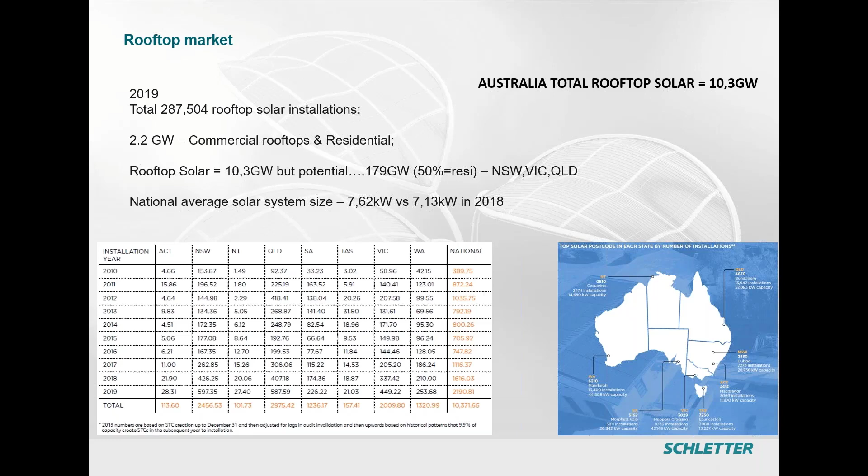A little bit about the company. Schletter is a global provider of solar mounting structures. We've been in the business since 1968 and in Australia since 2011. Cumulatively, we installed around 35 gigawatts of mounting structures. In Australia, that figure is around 600 megawatts.

It's a significant business because we're an international company. We have the ability to scale. Headquarters are based in Germany. We have production sites in Germany, USA, and China, and branch offices in all the major countries. So it truly is a global business.

We don't offer simply rooftop solar. We also look at fixed tilt structures, which is a very big part of our portfolio. We've just launched a single axis tracking solution, which has already started to roll out in New South Wales. And then, of course, we do carport systems, and various different rooftop systems. So we cover the whole gamut of solar mounting structures.

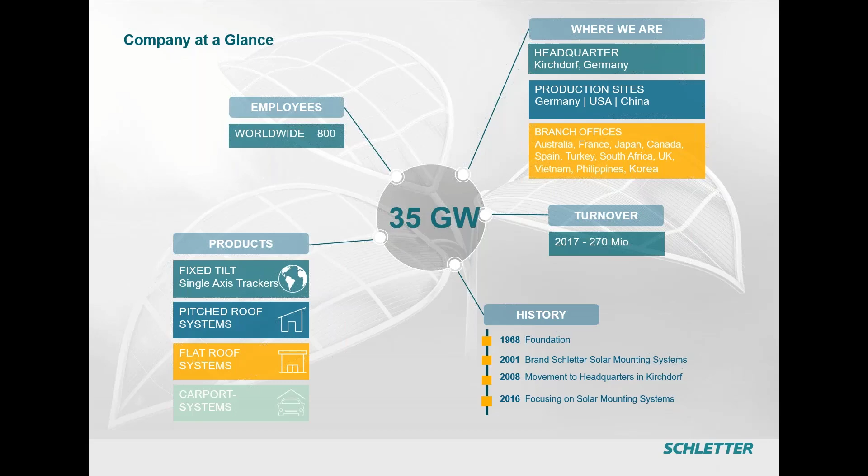As I said before, ground mounted systems, flat roof, we cater for pitched roof as well, facade, carport structures. We've partnered there with a company called Solar Carport Solutions. Together with them, we will continue the rollout of our solar carports, and then more recently, the single axis tracking solution.

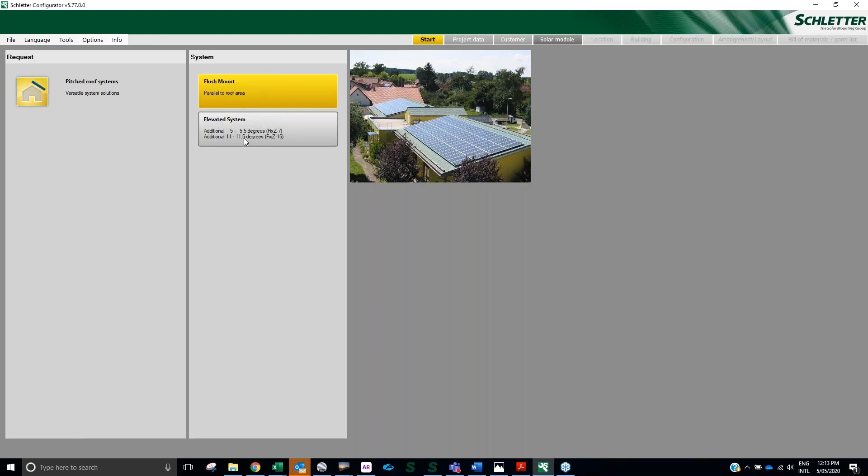And you might find later on that you will see some German words still in the tool, and little by little we'll be translating those for you. So as an assumption for this discussion, let's use, for pitch roof, just a flush mount, because the elevating system might take a bit longer. And it's just an introduction.

So we use flush mount, and then you go to project data. So don't worry first about the order number, we're still talking on how to serialize this one. And then for the project name, you can go for ABC if you want.

And then the company name, and then who is using the tool, and then all of this data.

Now, for solar modules, I'd like to emphasize, I know there was a commitment of under 20 minutes, and this is really going to happen after a certain number of times that you use the tool. Things you have to prepare before using the tool, this will even be lower than 15 minutes if you have the following prepared.

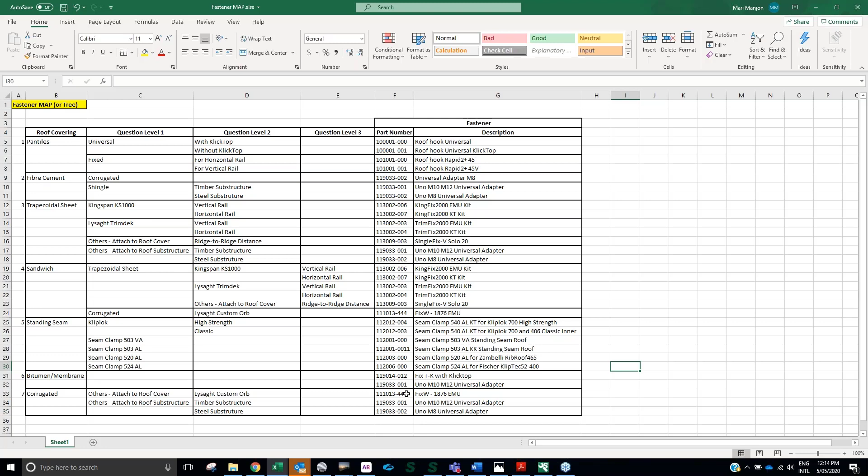So if you know the roof type, there are several roof types. Just to give you some examples, roof types could be tiled, fiber cement, trapezoidal roof, sandwich, standing seams, bitumen or membrane, and corrugated. Under each of those, you still have several types, and then under, let's say, a Lysaght Trimdek, you have a vertical rail. So these are things you have to be prepared for prior to the start.

And then, of course, you have to know and identify the area where to mount with dimensions, and then an intended layout, what system you intend to use, and the module data.

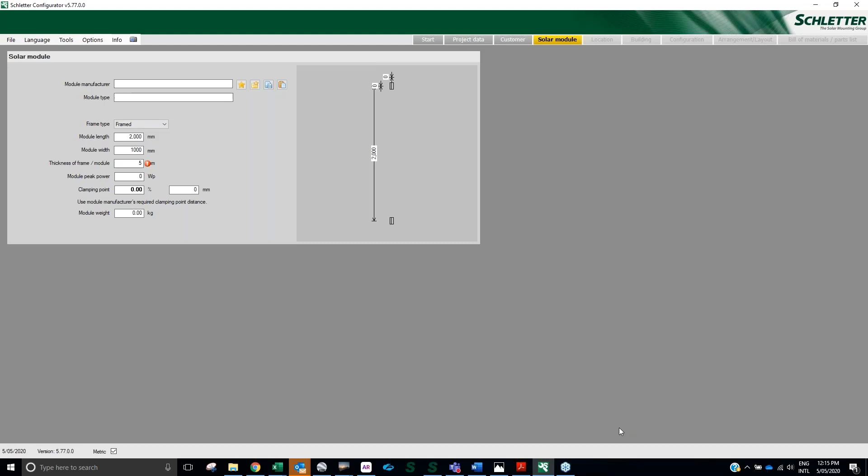For the module data, what we need is really the length, the width, the thickness or height, and then the power. Let's use examples here: let's say it's 2 meters long, 1,000 wide, 40 mil thick, and we have 400 wattage per panel.

And then clamping point - it is always best for you to have the manufacturer's data on the module, because there you will find the clamping points, and normally it's 25% from the edge.

And then you'll also get the module weight. So if, let's say, this is 20 and you are not sure if it's 20 or 22, always take the lighter weight that you are thinking of. It will always be safer, more conservative. But of course, if you have the manufacturer's product sheet in front of you, you don't have to guess the module weight nor the clamping point and all of this.

So once you have filled this up, you'll be allowed to move. You have a graphical representation here, and then you'll be allowed to open the location tab.

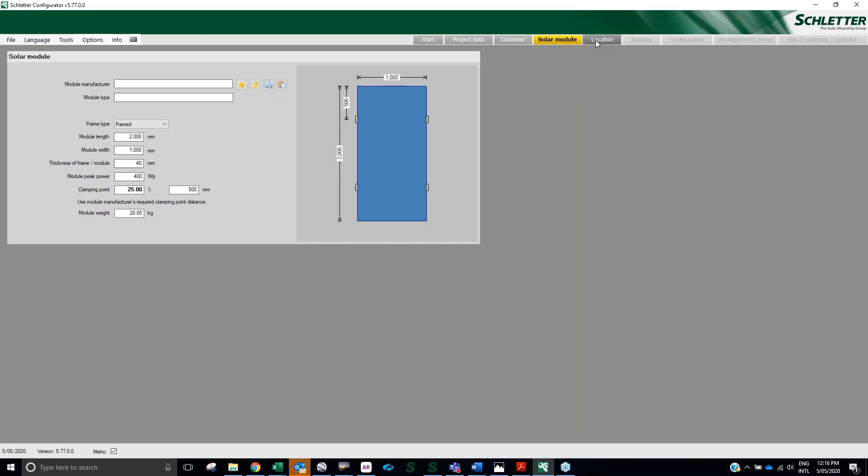Location tab, of course, like I said, you have to prepare the info on the location. So let's say it's Sydney, just an example, and let's say you have those points. Here you have to input the exact street, although that will not impact any part of this calculation.

But this height above sea level, you have to know, right? So if you're asking, how will I know the height above sea level, and how will I know the terrain category, I suggest that you go and use Google Earth, something like this.

Let's say the project was in Derby. So just type Derby and then go close. And let's say it's this house that you're doing a design on. So you try to measure that house from the sea - you see there, it's only 161.

And then you have to know the level of salinity. If you don't know, but you're facing already the ocean, you can be assured it's high in salinity. So if it's less than, let's say, 400 meters, the aluminum components will have to be anodized.

But the thing you have to know in terms of filling up the spreadsheet will be the height above sea level. So if we're doing a project on this roof, the height above sea level you will find here - this one, the height. If it's this one, you see it's almost 66. If you move around it, it's still 66.

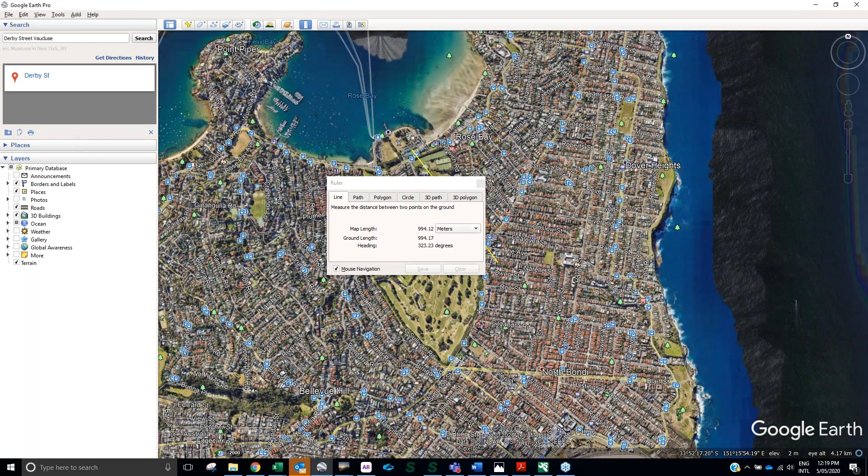So if it's here, and then you try to measure that place, it's almost 1 kilometer from there, then that will really change this one. It's no longer terrain 1, most likely it's terrain 2. Okay, so terrain 2 area with low vegetation, etc.

So you'll have to acquaint yourself. In the first run, try to read all the definitions so you'll be on the same page.

And then if it's a house, 1, 2 stories, up to 15 stories, not many people will be in there, you can consider that as an importance level of 2, and then go for 200 years. But if you go for higher buildings or emergency facilities like airports, hospitals, etc., they are high importance level, so you have to choose 500 years.

Now for the corrosivity, if you don't know, try to check and imagine the distance from it using, again, Google Earth. So if you're very near, this cannot be moderate, maybe it's already severe, almost equivalent of having swimming pools or chemical plants around it.

Okay, so after you're finished with the location tab, you go to the building tab. Building tab, like I said, you have to prepare the dimensions of the area that you plan to install.

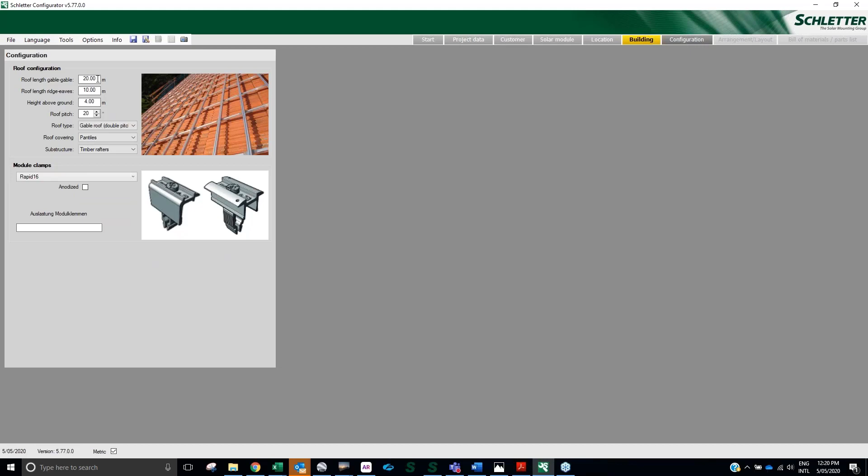So you have the gable to gable. Just to be sure, the definition of gable to gable is that length. Ridge to eave is this. And then the height above ground, which we saw was 6 meters based on the Google Earth.

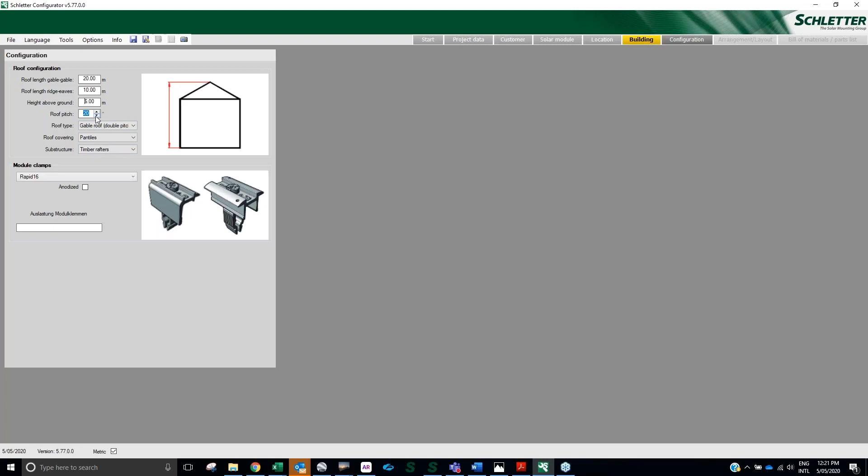And then roof pitch is, let's say, 20, or you can go 19 or 18, etc. And then the common one, it's trapezoidal roof. And let's say you have timber purlins, right? So those types.

And then now Rapid 16, it's the type of module clamp. So this is how it looks. If you want them anodized, because that area most likely will need to be anodized, so this is how it looks.

And then here, don't mind this initially because we have not loaded the data that's intended for this configuration. But this one will tell you that these ones are going to be within the tolerance.

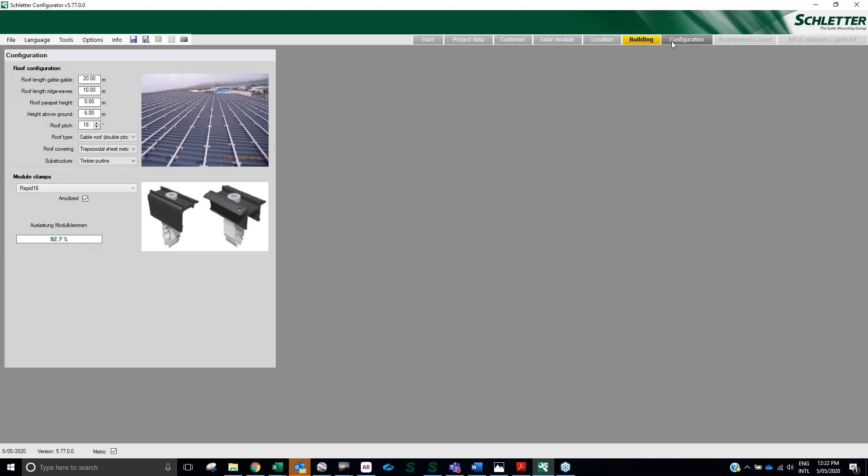Okay, then we go to configuration. So it was pre-filled already in previous page for the 20 and 10.

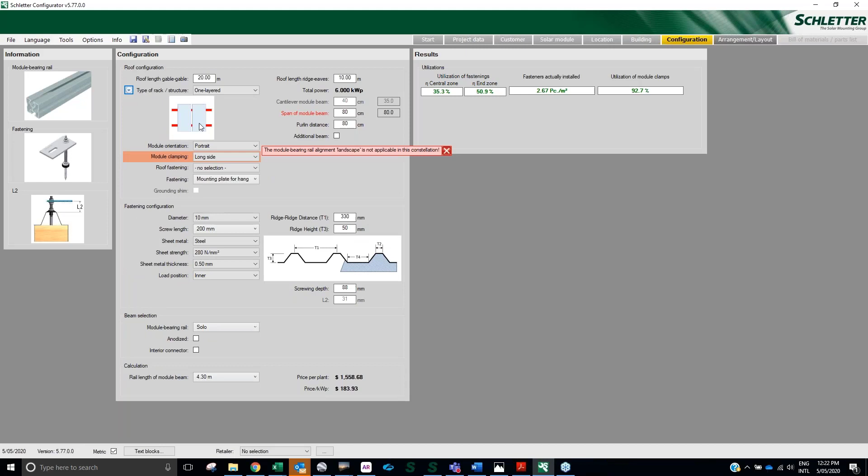One layer or double system. If you're not sure how it looks, you can press this down arrow, and then this is how it looks. If you chose the double layer, that's how it would look.

No? Hold on, I have to go back to building afterwards.

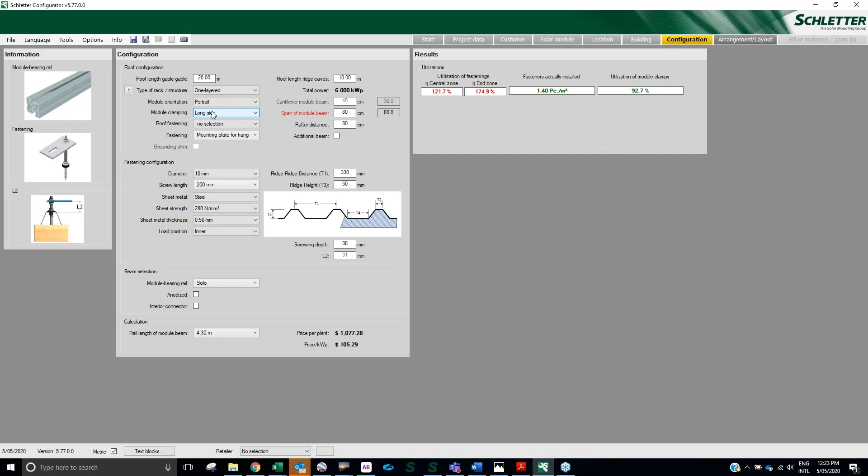So now we do not need, let's say, to go cross-layer, we only need one layer. So we want to clamp on the long side, which is the usual clamping point specified by most module manufacturers.

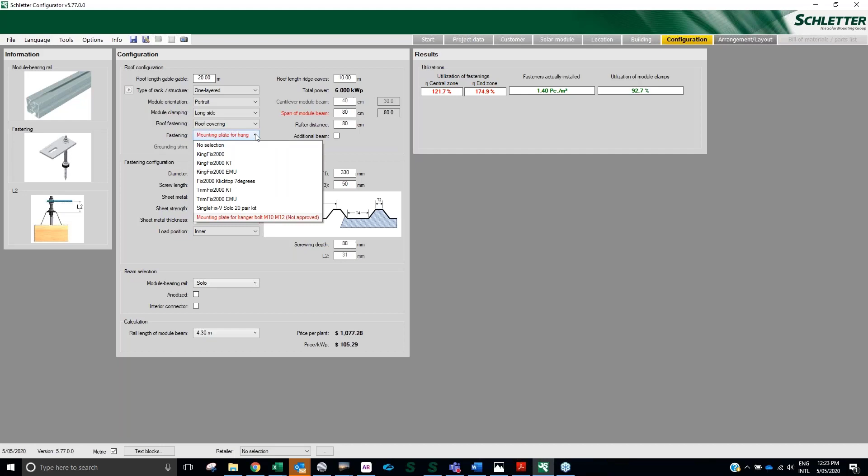So the mounting fastener that we plan to use is kingspan special design, which is KingFix2000 KT, which means a Klicktop. So we have that, and then we know the thickness of the roof.

And then when it's kingspan, the ridge to ridge distance of kingspan is 333, and the ridge top width for kingspan is 30, and then the ridge height for kingspan KS 1000 is 35, and then the valley of kingspan roof is 270.

So you'll see what these T1, T2, T3 are. You'll see it from this. And based on the roof manufacturer's data sheet, you'll be able to get all of this info.

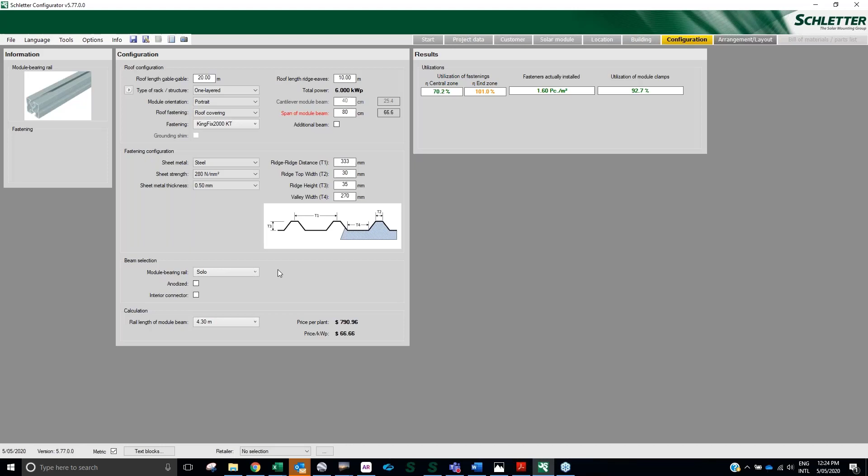And then now you will see that you have to decide now on the use of the rail. So the rail, you will see, let's say Eco, that's the cheaper one. Solo will be the usual, Solo Plus will be the stronger one, as evidenced by the amount of utilization that you'll see here.

So this area here shows you the utilization rate. If it's in the center zone, it's 78.2. Now if you're in the end zone, it's 0. It's above 100, which is 101%, but it's in orange, no?

So you see this one, the ridge to ridge distance of the Kingspan roof is 333. So this is 66.6. So you have to match it to 66.6 if you want to go 2 ridges.

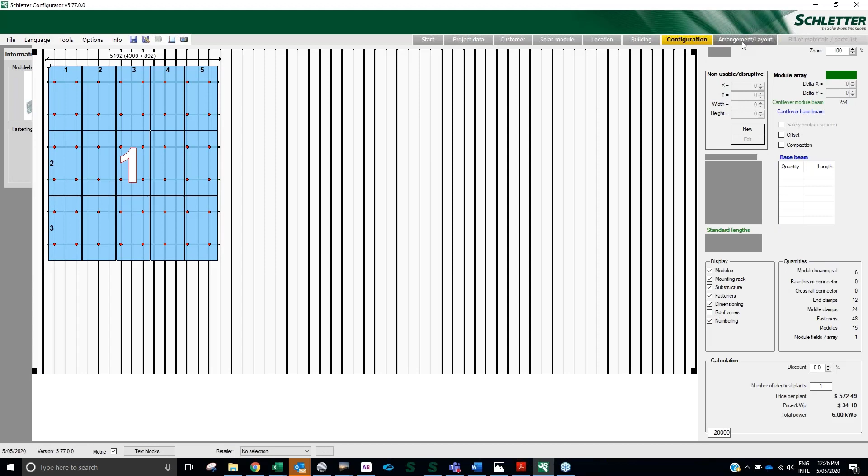Okay, and then now we go for the layout. Layout, let's say the customer wanted to do 2 rows of 10. So you can edit that one to 10 per row and then 2 rows like that.

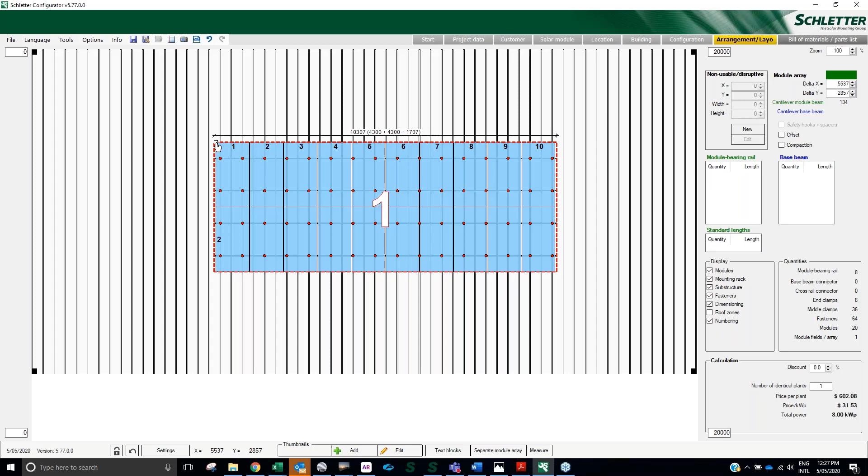So these lines here represent the range of the roof. So if you want to put it in the middle of the structure of the roof area, that's it. You're done.

So you want to see the bill of materials, it's there. So you need 10 rails of the 4.3. You need 8 pieces of the connector, and then this is the fixed KingFix 2000.

We still have to improve, like I said, it's a work in progress. And then it is 64 pieces of that.

And then we have to add some self-tapping screws for this, which is 4 times 64. We have to manually enter that here.

And then it tells you already the mounting clamp that you need, and then the ends, the mids, and then the grounding. Grounding, we normally allow 1 grounding clamp per row only.

Okay, so these ones at the start, I will have to get what we call, let's say this one will be saved in an XML file that we call.

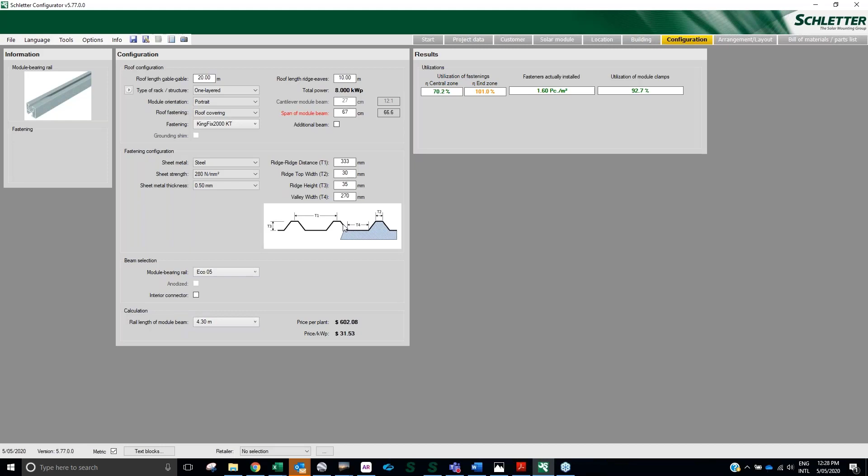And then I have to check it because there are still things here that have to be added. Because you see the configuration here, Eco, you have to pick the anodized one, which are still not being done. So I have to check it because the location is high in corrosivity, and we have to change everything to anodized. There are some limitations at the moment for this.

We have another version in our office that I can use just to correct it. But at least you will have an idea of the expense. Don't mind these unit rates here, they are not true, they're just dummy figures. And you can immediately have an idea of the BOM.

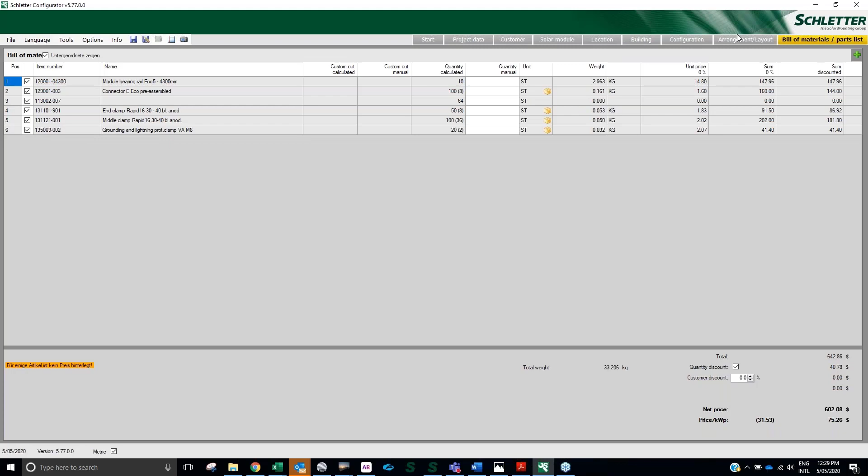Okay, so that's the end of my presentation. I forgot to mention that you will only be able to get a copy of the design report if, let's say, it has been ordered. We are able to give only the BOM, but not the design report.

So, Sebastian, maybe we can go and open the discussion to the questions and answers.

Yeah, thanks Mary. So we will do this part at the end, but really great tool definitely here. So maybe I will go with the Fronius side of things. But again, thanks guys for presenting on Schletter and a bit of history about the company. That was really, really good.

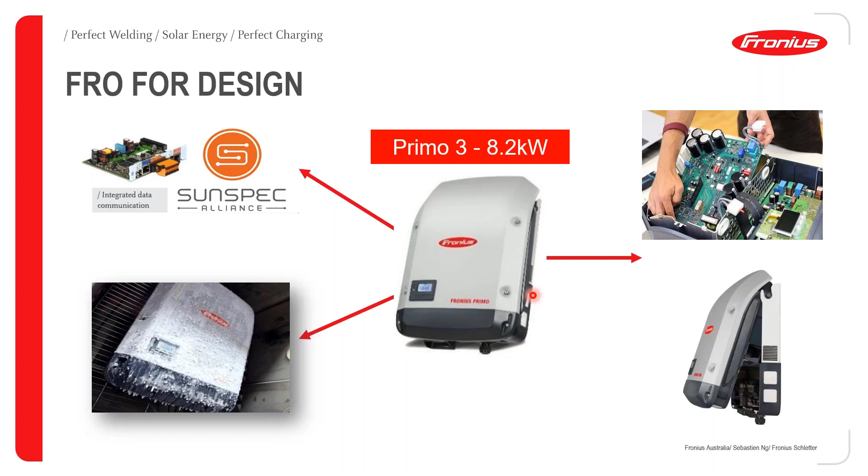One particular thing we specialize in is optimizing the time you spend with the inverter, whether for installation or exchanging components. We have a program called the Fronius Service Partner Program, where you're allowed to change boards. But if you need to swap an inverter, it's also really easy and simple - you have 4 screws and the inverter is off the wall. So we really want to make sure any inverter we come up with is designed with those 3 concepts to make your life easy on site.

So let's have a look at the Fronius PRIMO. I'm pretty sure a lot of you guys know this range. PRIMO - the prime means single phase, so this is our single phase inverter, and we have different sizes. You have PRIMO 3 to 5, and the 5 here is basically the international version. Then you have the PRIMO AUS, which is a legacy inverter. Then the PRIMO SC, which is a 5 kilowatt inverter. And finally you have the PRIMO 6 and 8.2.

One difference you have with the PRIMO 5s, for example, is that one of them has a maximum input current of 12 amps, compared to the PRIMO AUS and PRIMO SC, which are rated at 18 amps. Then you also have differences in the nominal AC output. One thing we get a lot of questions on is, hey, what's the difference between all those PRIMO 5s? What can I do? How will the inverter perform? So there's quite a lot of questions.

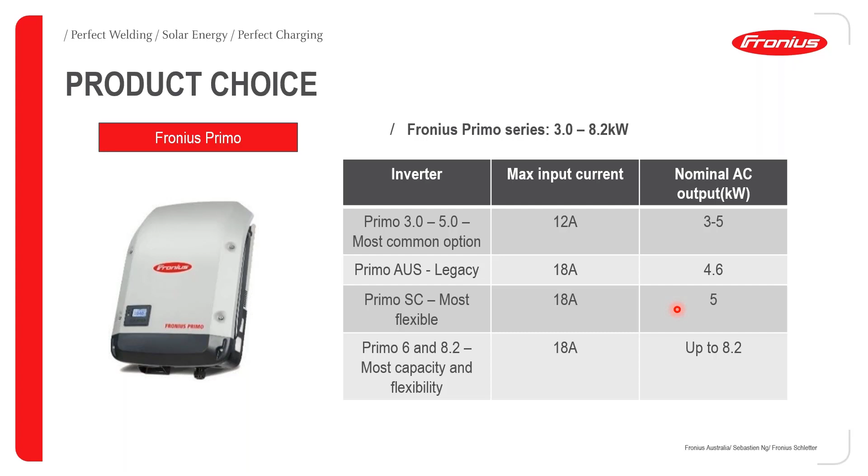So we've summarized the whole topic in one table. The first thing to look at is the PRIMO 5 International - it's rated at 12 amps. The AUS and SC maximum input current is rated at 18 amps. The maximum short circuit current of the 5 International is 18 amps, the AUS and SC is 27 amps.

Now this is the interesting part. People say, okay, because the inverter nominal power for the AUS is 4.6 kilowatt, the inverter will produce a maximum of 4.6 kilowatt. It's not right. The maximum power of all 3 inverters is always 5 kilowatt - that's the maximum power, the nominal power is different. So the International is 5, the SC is 5, but the AUS is 4.6. What this means is when you oversize a system to claim the STCs, you need to do 133% times the nominal power. So for this particular one, you can claim only 6.11 kilowatt compared to 6.65 and 6.65 for the other ones.

So this is one of the major differences there. The second thing people say is, okay, the max input current of the AUS is 18, the international is 12. So what happens is people say, okay, this is the maximum input current, I can't go above that. The thing is, you can go above the maximum input current, but you can't go above the max short circuit current.

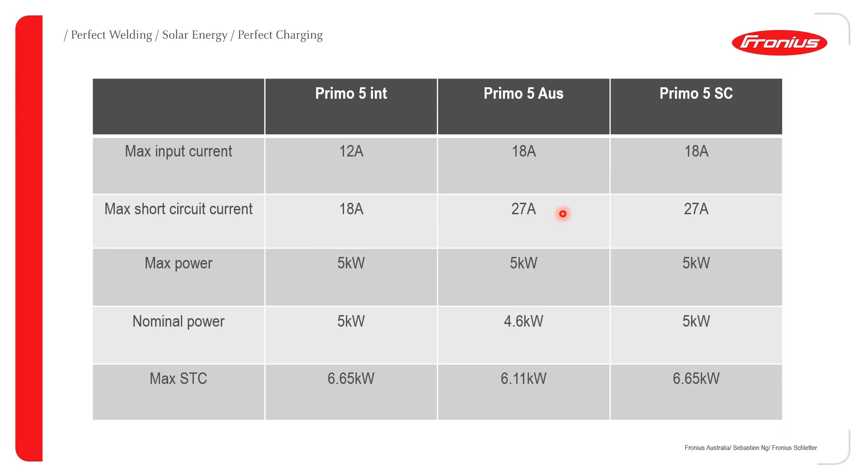So let's design one system so you get more information. We have a configurator tool which checks the string just to make sure it works. From there we have a question, which I'll cover at the end. With the Fronius Solar configurator, it's just to check that the system will work. There's a lot of configurators out there which do the whole thing, but for us it's basically checking that if you use this software and it tells you it works, it will work, and it guarantees in a way that your design is good.

So I will show you the Fronius Solar configurator. This is how it looks like. You can click on login, and from there it is quite straightforward.

The first thing I'll show you guys is, for residential, you're capped at 600 volt maximum. So what you can do on the Fronius Solar configurator is put a setting where it will only show you systems which have a maximum of 600 volt.

So for example, what you do is log in — yes, this is my full name. You click on user setting, and from there this page will show up. From there you can set up the maximum DC voltage here to be 600 volt, press OK, and then all the systems will show up.

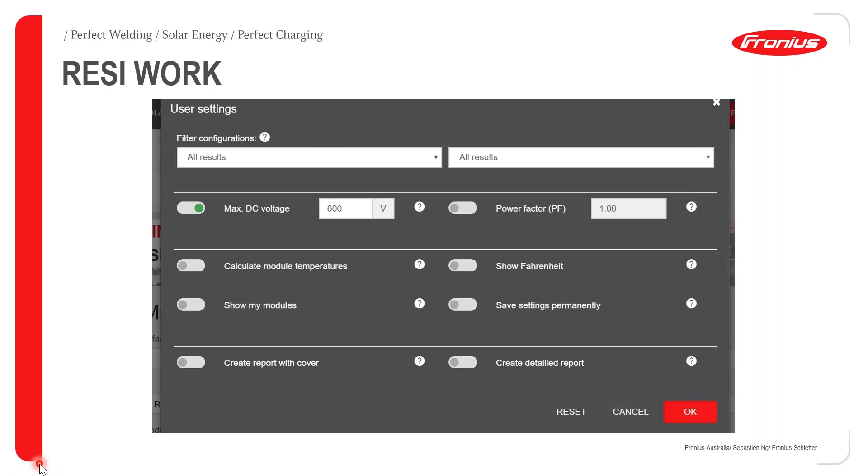So if you guys are doing residential and commercial at the same time, what I'd recommend is please make sure this is set up correctly. From there you move to the next step — you've already set up the platform.

What you do next is select the module. Really simple — for example, I selected REC, an old panel, 250 watt. One thing I do with all my designs in Australia, when installers call me to get more options, is change the module temperature from -10 to 10. We have a white paper explaining why we change it, so I can go into more details there.

I select whatever inverter I want — here it's a PRIMO 5 International — and I say, okay, I want to oversize it by 140%. The inverter can actually do 150, I just wanted to see all the options available.

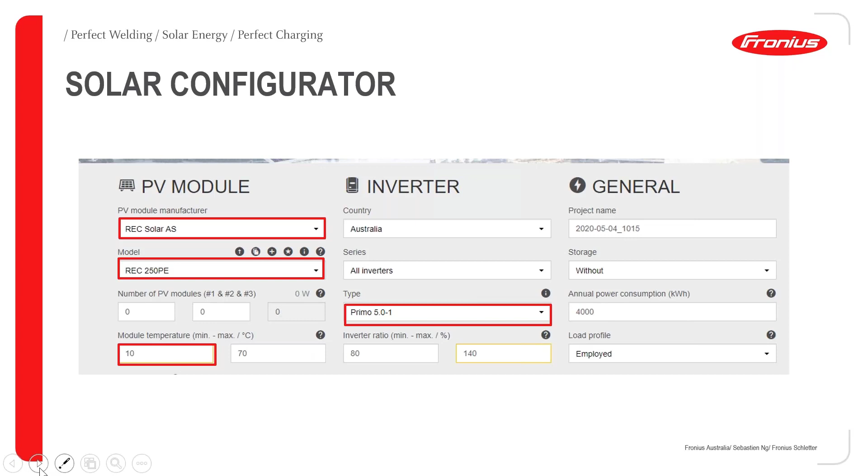From there I click next, scroll down, and see all the options. At the top you can see the maximum DC power connected to the inverter, how many panels are connected to the inverter, and it gives you all the string configurations.

So here, looking at the options, the one I wanted to select was 2 times 8 on the first tracker and 1 times 11 on the second tracker. Remember, each tracker's maximum input current was 12 amps, and the maximum short circuit current was 18 amps.

Just to show you, when I click on this option, I see this particular table on the right hand side. It tells me that your max short circuit current at 25 degrees is 17.72 amps — I'm not going above the short circuit current, I'm still below it. And then you can see per string it's 8.28 amps.

So what will happen is we're going to add those two currents on the first tracker. Remember, the inverter is rated at 12 amps. So let's see what will happen to this PRIMO 5 International.

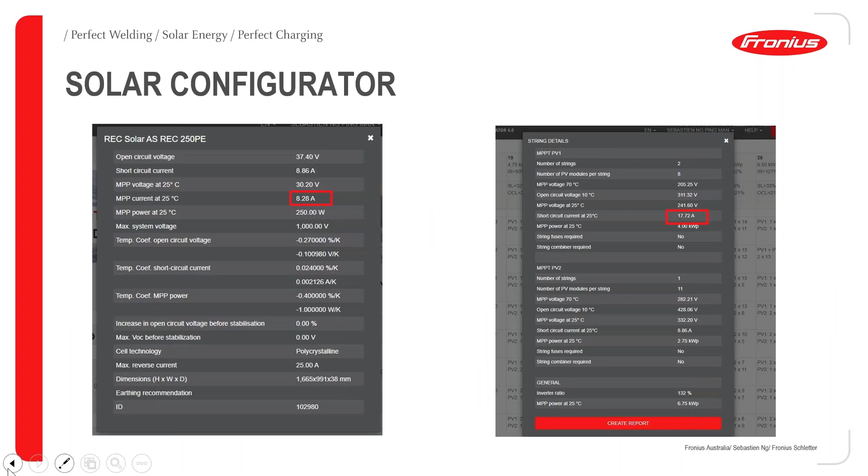In my design, what I selected is to do an east and west with those 8 panels. Let me go back for a minute — so the 2 times 8 goes east and west, and the 1 times 11 is facing north. The one I want you guys to focus on is this 2 times 8, so let's have a look at that.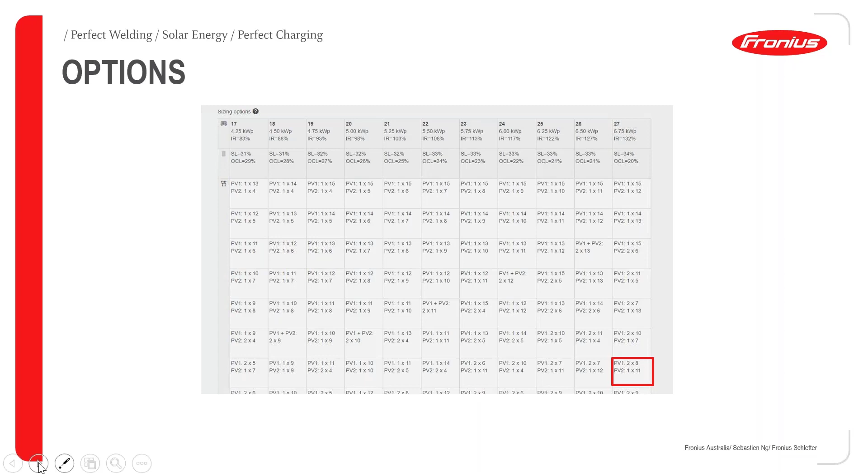So if you have 2 strings of 8, one facing east, the other facing west, early in the morning we can say that the first string will have 10 amps, and the second string will have 2 amps.

It comes to the inverter, you add that together, and you have 12 amps. You're not going above the max input current. During, let's say, the middle of the day, you can have 7 amps going into each input, which makes 14 amps. Now there is 14 amps available, but the inverter can take only 12 amps. So if you think about this scenario, the panels are basically the source of energy, the inverter is the load, so we will just take 12 amps.

So you have a bit of losses in this situation. Then in the afternoon, it's basically what happened in the morning, but on the opposite tracker, for example. So then we need to understand what happened to the actual system and where you have a difference.

If you look at parallel 2 strings on one tracker, let's say in the morning you have 2 amps, 10 amps, the currents get added and it goes to 12 amps. You're not going above the limit. Then from there, if you have a 2-tracker inverter, the current will go to one tracker, and the second current will go to the second tracker.

How do you calculate how much power? It's basically this formula. You take the voltage here, so the total voltage in series is V1 plus V2. If you need to calculate the power, it will be 2 amps times the voltage plus 10 amps times the voltage. This one is different — you need to add the current, and then use this formula. That's where you have a bit of losses.

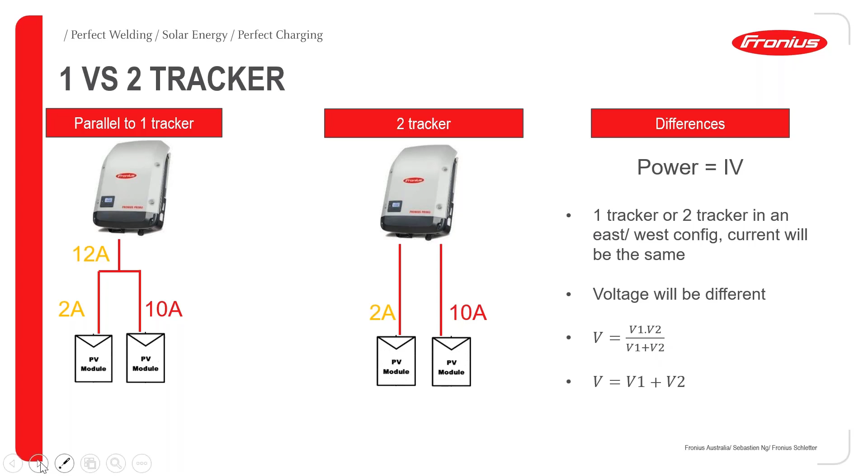Now the question is, how much losses do you have in this type of situation? Let's take this scenario, an east-west situation, early in the morning. This string has, let's say, 5 amps, this string has 1 amp. It goes to one tracker, and the current will be added, so you don't have any losses because of current. Even if you have 1 or 2 trackers, it will be the same amount of current coming to the inverter.

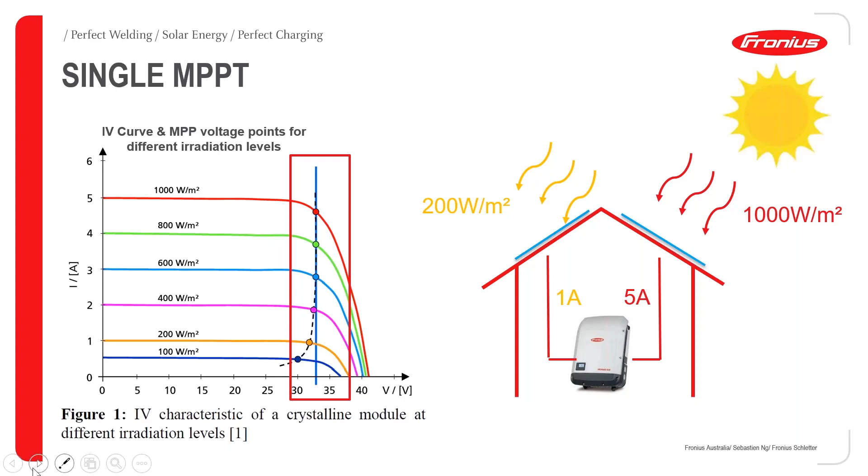What will be different will be the voltage. For example, at 200 watts per square meter, you have, let's say, 33 volts, and at 1000 watts per square meter, you have around 34 volts. This is where you get a bit of losses, where the voltage is a bit different. So the first place you can get losses is when you're paralleling and go above the maximum input current, though in east-west you'll usually be below it. The second place is when the voltage is a bit different, but you don't have losses because of current in the morning, except if you go above it. That's one important factor to consider when designing east-west on one tracker.

People think that having 2 trackers versus 1 tracker is always the best. We have a white paper which explains that clearly, but it's not the case — it basically produces quite the same amount of power. We had 2 single tracker inverters, each with 1 string, and then 1 single tracker inverter with 2 strings in parallel to it, the same case scenario. You can see the system produced the same amount of power.

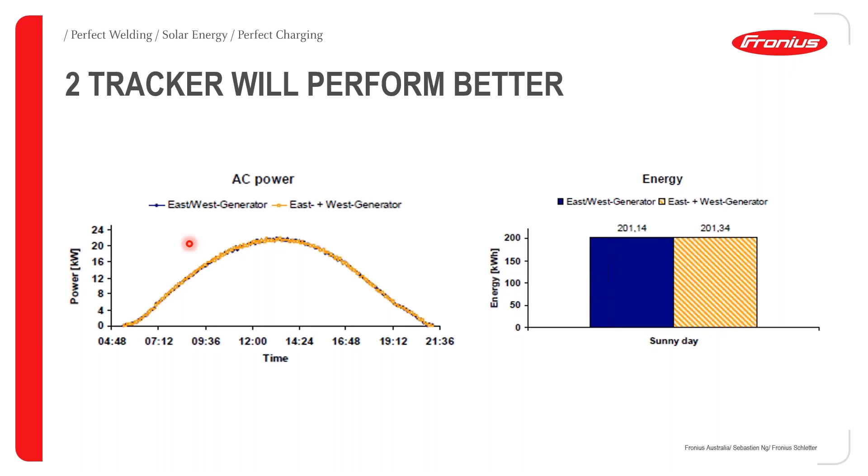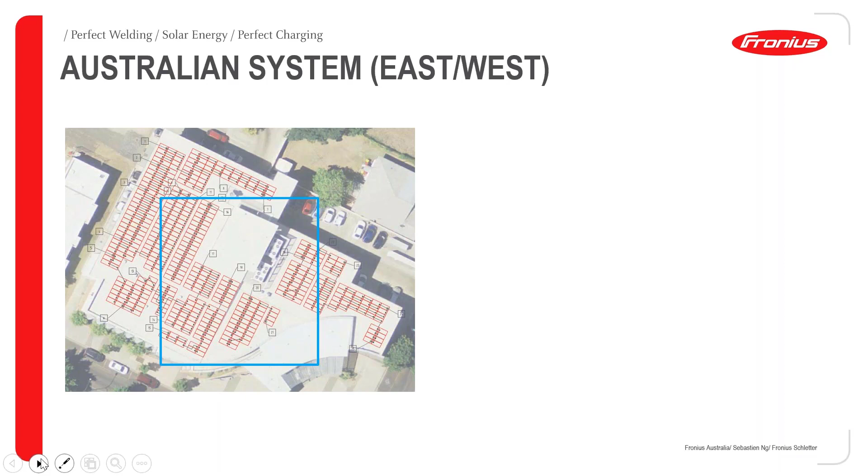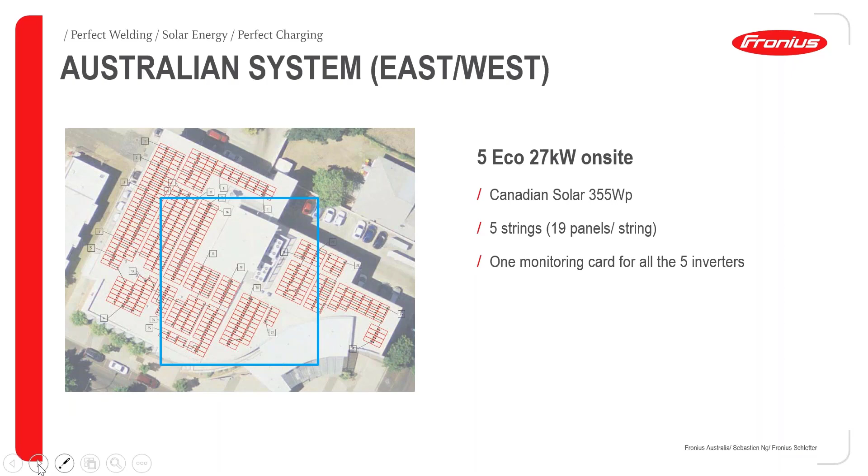This was a case study that we did, but we also have a system here in Australia — a few systems here. People are starting to do it more, especially with our commercial inverter, which is a single tracker inverter. What they did here is they paralleled 3 strings and 2 strings — 3 strings facing west and 2 strings facing east. If you look at the system, you can see 3 strings facing west, 2 facing east. The most interesting part is they had a bit of shading here also on the panel.

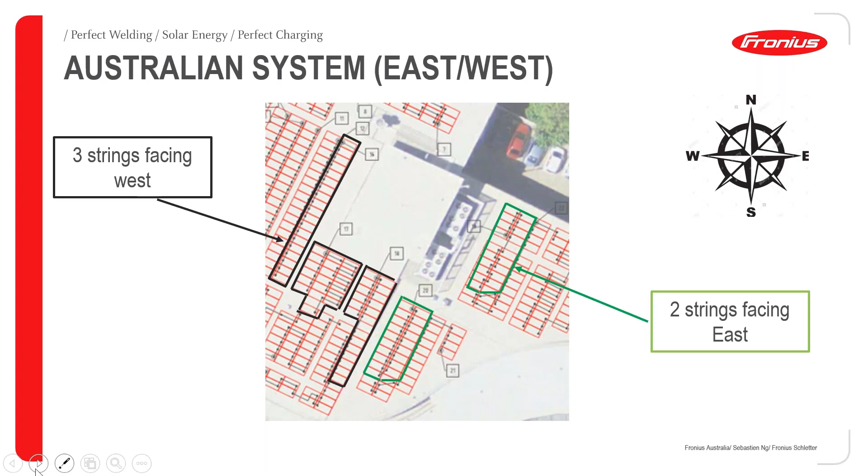So what we did is we wanted to compare what the system produced, because we have 5 inverters on site, and some of those inverters have all the panels facing one direction, for example. It was really interesting because on our solar portal, when we measured all the power, it was practically the same. I was quite surprised by it, because there was also a bit of shading on some of the panels there.

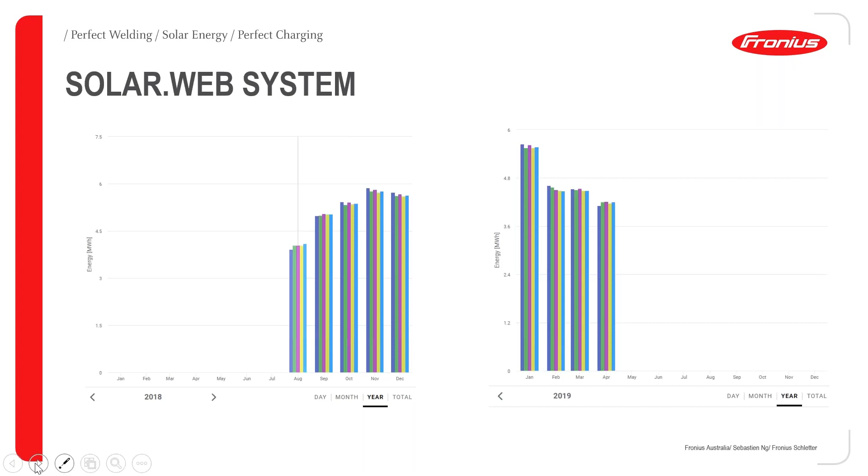But you can see that we have data to show that you can do an east-west or split system on one tracker. So the next part is basically with our Fronius smart meter. We always say to add a smart meter to a system, because it future-proofs it. If you have a smart meter installed, you can define load. Also, look at companies like Facebook - data always has value. We highly encourage installers to add that, because in the future you'll be able to do simulations, and there will be a whole package if you have a smart meter, because we need the data to see what's happening on site so we can give recommendations.

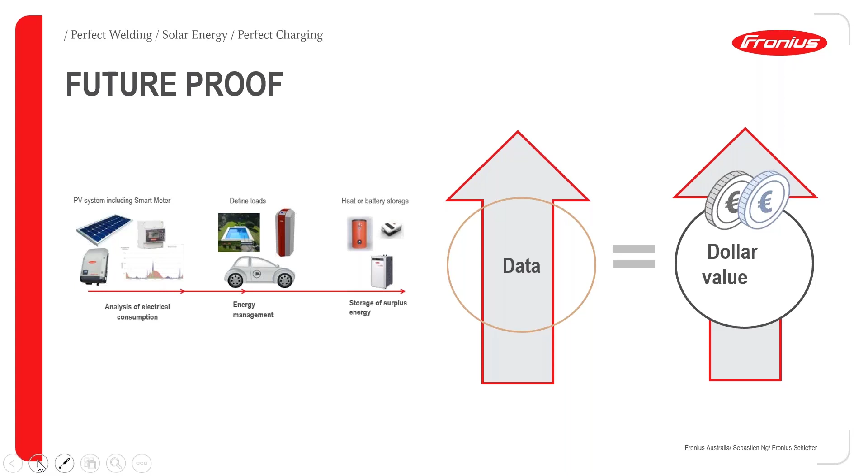So from there, it's quite simple. How do you install a Fronius smart meter? It sits usually after the main switch of the property. Then you have the Modbus communication to the inverter, just RS485. There's also a Wi-Fi option, but I won't cover that here.

One thing we see quite often is with the twisted pair for RS485. When we say twisted pair, it's really interesting - I learned it the hard way, I would say. So when people say twisted pair, they have, for example, blue and white and blue - they twist it together and then put it in D positive. Then they take another pair, green and white and green, twist it together, and put it into D negative. When we say twisted pair, you need to twist, for example, blue and white together - one end goes to D positive, the other goes to D negative. That's how you do twisted pair.

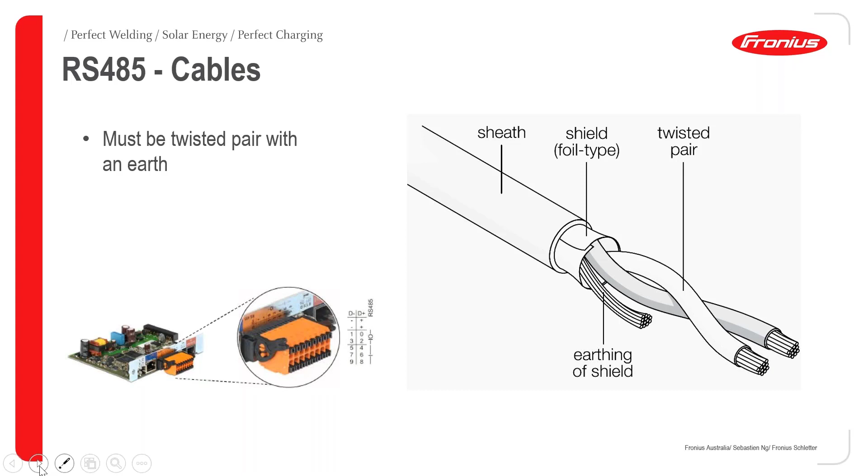Then you bring your earth cable there. That's really important, it makes a difference, definitely. So I highly recommend you have a chat - I always ask installers, hey guys, how do you do this? And it's always an interesting answer, but I highly recommend doing the twisted pair like that for the RS485 cable.

Then the next step is setting up the meter. I think there's some confusion when it comes to installers putting the meter and enabling it at the right location. So the meter, as mentioned, needs to be set up after the utility meter, and from there, this is what we call the feed-in point. How do we do the calculation to see how much is going to the grid?

It's really simple. We have a data manager card. We know how much the system is producing, and from there we know how much the meter is seeing going to the grid. So we just take whatever the inverter is measuring, whatever is going out - this is going to be our load. So when you activate the meter, you need to select feed-in point.

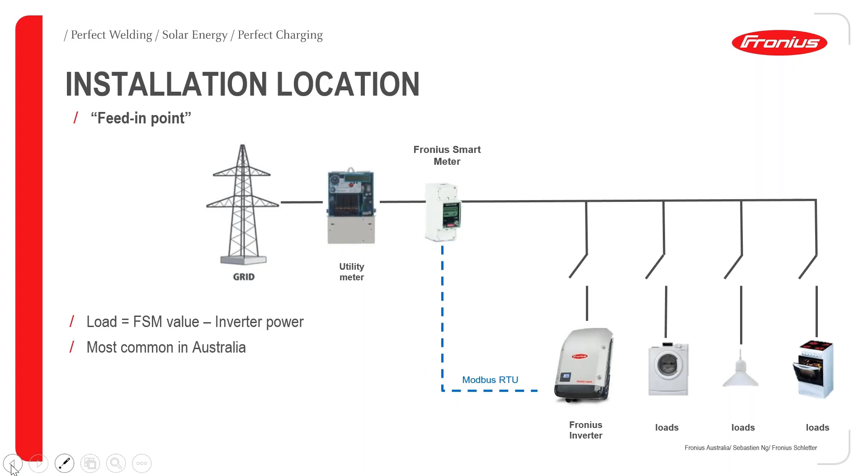The thing is, some people think, okay, I'm measuring consumption on site, that's why I have this meter, so I will activate it as a consumption point. But the consumption path here is basically this setup: one side you have the utility meter and the inverter, the other side you have all the loads - that's what we call consumption path. In general, I'd say just remember this option, feed-in point - that's the way to go. That's how you do export limit, for example.

So that's pretty much it on my side. 24 hours of sun - this is basically our vision, 100% renewable.